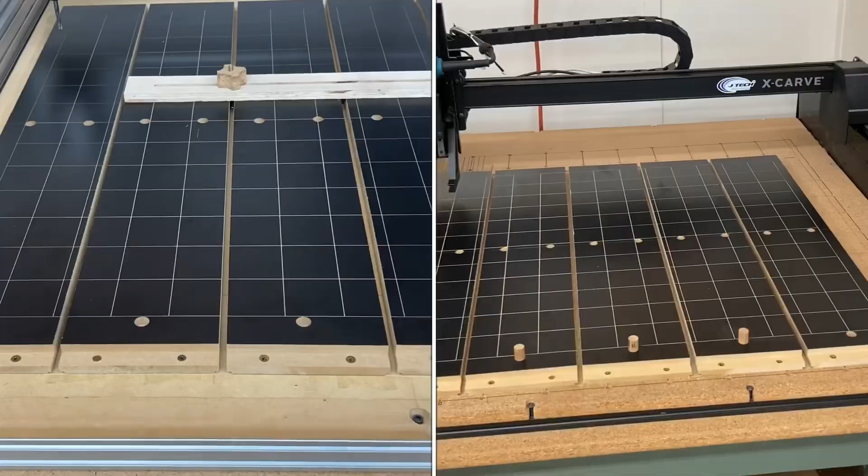The plan is to use the same design that I used on the CNC for Newbie new carve machine. This has worked absolutely fantastic, and I love this new wasteboard and the clamping system that I have. So I'm going to do the exact same thing. When I designed the grid work that I carved into the wasteboard, I used the XCarve Pro. And today I want to be using the Easel software to set up the same program.

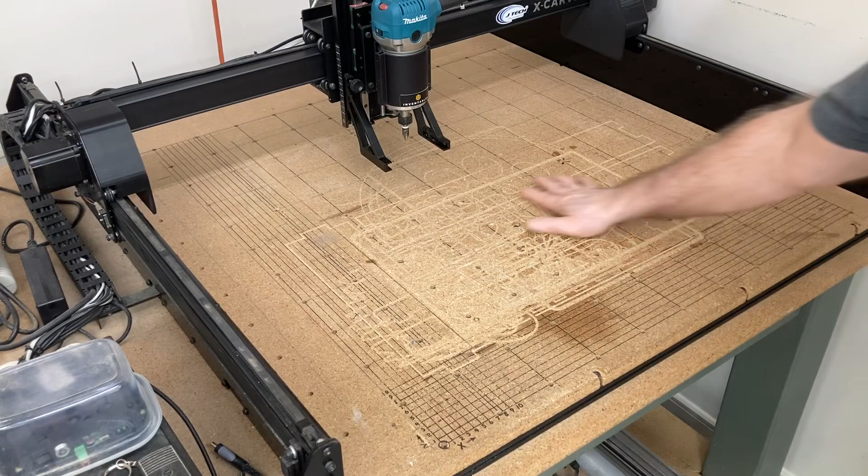Now this is the original wasteboard that I put on this machine when I bought it. Now this is actual particle board. This is not medium density fiberboard. And if I had to do it over again, I would use the MDF or the medium density fiberboard. The particle board has served its purpose and has done well. And if I remember correctly, I bought this machine back in November of 2016 or thereabouts. Don't quote me on that. And this is the original wasteboard that I had put on.

And this actually is the high spot. This board has been chewed away in this area, and this is a little bit lower over in this area. And it's about a 1 millimeter difference from the high point to the low point. So the first thing we're going to do is surface this entire wasteboard, and then I'm going to add the new wasteboard on top, just as I did with the CNC for Newbie.

Now the first step is to find out exactly the space that I need to be able to surface. And I have right here the old grid work that I hand drew, and I don't recommend that. And that's something that I no longer do. But I have the XY0 home position right there, and this red line actually was my do not exceed line. I did not ever want to go beyond that point. So that was a good reference for me, and yeah, that was just drawn in. This is my other reference point right here. I really don't want to go beyond that point.

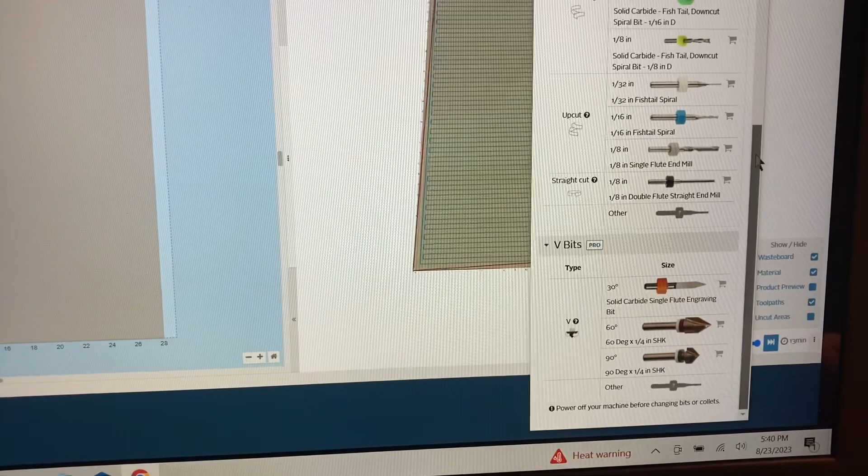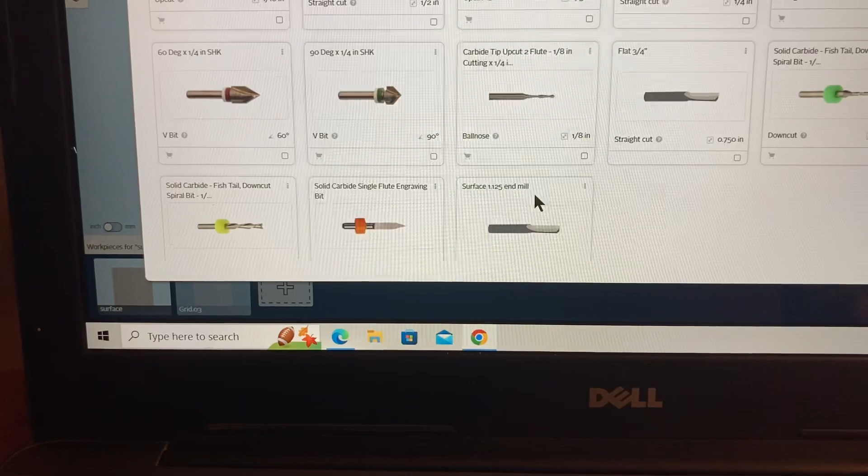First thing I want to do is show you how I set up the bit. Now this is a 1 1/8 inch bit. And when you click on the bits, you have this section right here where you can just click add a bit. And when you do that, you get to see your whole entire library of the different bits that you have. Now this is the surfacing bit that I have, and I've already entered it, but I still want to show you exactly how I did that. And you're right, no, the picture does not show a 1 1/8 inch diameter, but it's actually there.

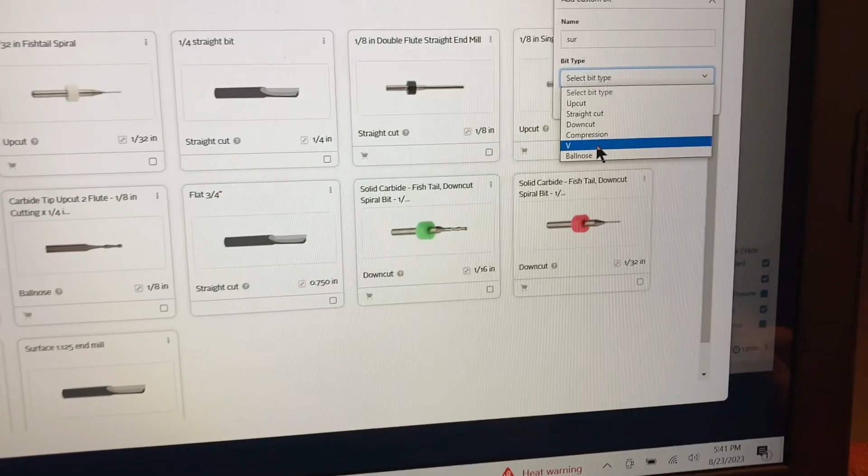So let's click on add a bit, and you get a drop-down menu where it's custom or the Inventables. Well, I'm using the custom. So you type in the name, and I put in the surfacing bit, and then you get to put the type. Well, it's basically an end mill, but you can see a wide variety of different choices. So I'm going to select the straight bit because that's the best option that I have, and then it brings you up to the size. And this is where you put in the 1.125, and then you can hit save. Now I'm not going to hit save right now because I already have it in my library, but that's the process that you go through to set up a new bit.

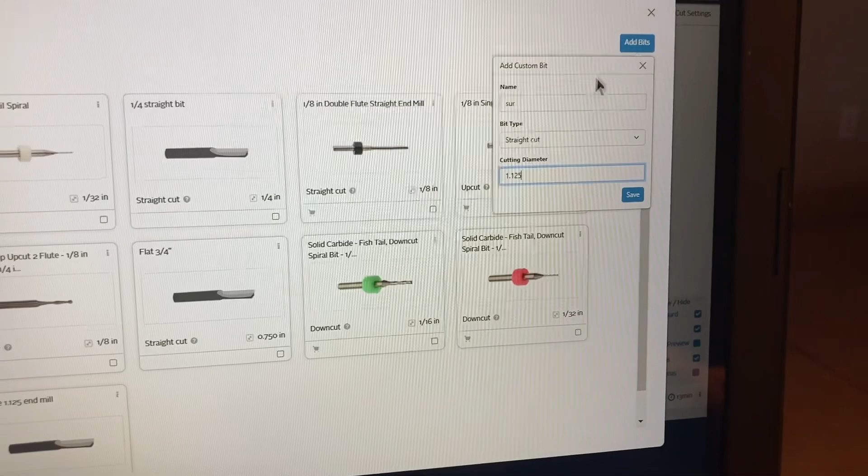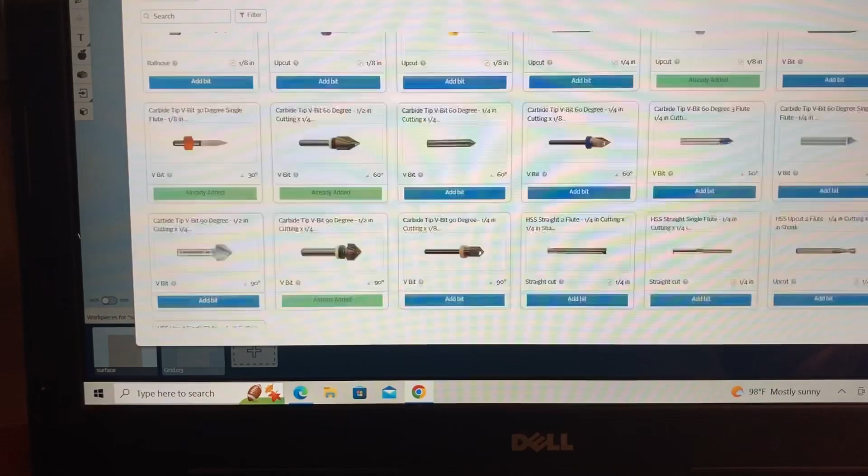And oh, by the way, if you click on add bits and select the Inventables tab, then you get to see the entire library that's available to you from Inventables. And yeah, they do have the pictures of these. So you can find the bit that you've purchased from Inventables, you can select it, you can save it, and it will add it to your library.

Okay, let's get back to surfacing the board. Now based on those measurements, I need to be able to have an area that's going to be surfaced as 28 by 28. The thickness doesn't really matter. So at the drop-down menu, I'll pull out a square, and I'll change the size of this to the 28 inches by 28 inches. And I can do that right up here on this little drop-down menu.

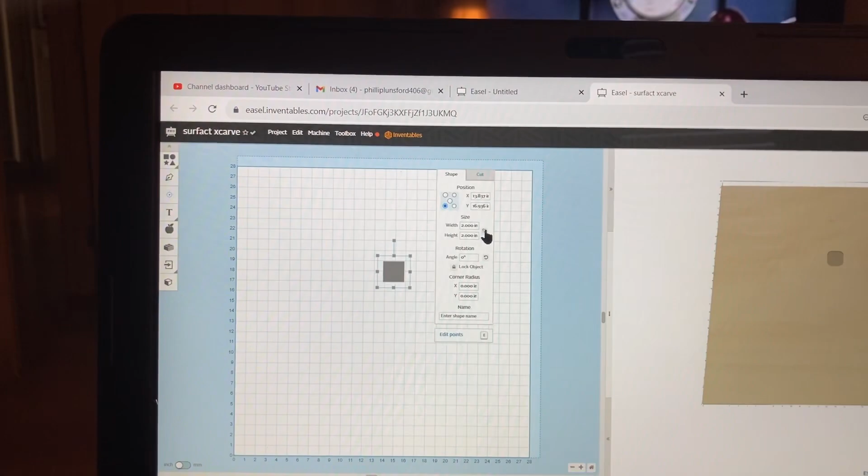Now the easiest way is just to lock that little tab right there, and then I can just type in the 28 inches, and that will take care of it. So you see where I locked it, then I'll just type in 28 inches, and that gives me a 28 by 28 inch square. From there, I can come up to the edit menu and select center to the material, and that brings it down and puts it directly on top of the work area that I have established, which also is the 28 inches by the 28 inches.

Now as far as the cut depth, I don't want to cut it down very much. I'm going to cut down 0.06 of an inch, which is about 1.5 millimeter, and that's going to be my start point to surface the wasteboard. And we'll cut it the first time, see how it looks, and if we need to run it a second time, we can do that also. Now I know that my wasteboard is at least 1.5 millimeters low in that area that I had showed you earlier. So that's going to be the first surfacing, and there's no need to take an aggressive approach to this.

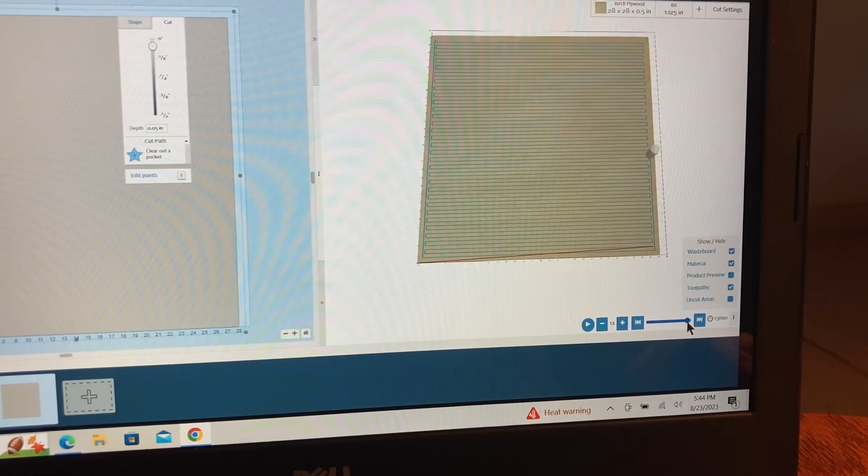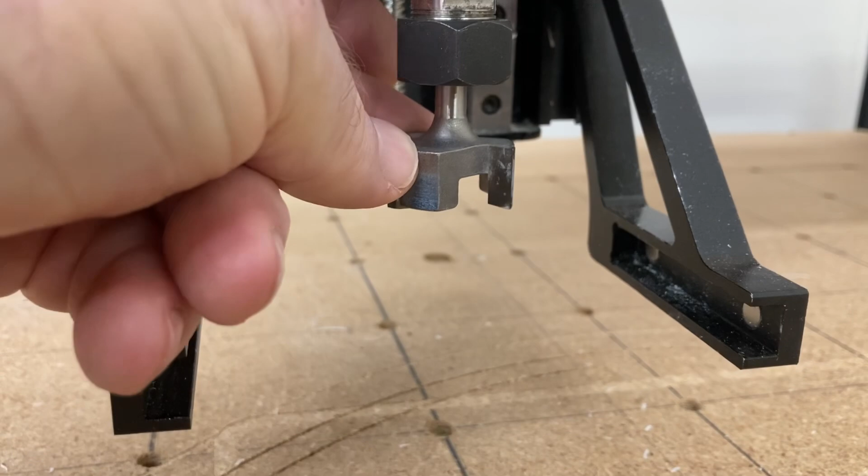Now I hit the simulate, and you can see that I had set up the raster setting in the Pro Easel, and you can see exactly how it's going to cut the surface of the wasteboard. Let's go out to the machine and actually get this cut. I want to show you a close-up of the bit that I'm using. This is my 1 1/8 inch surfacing bit, or my 1.125 inch bit, and you can see I've used it quite a bit.

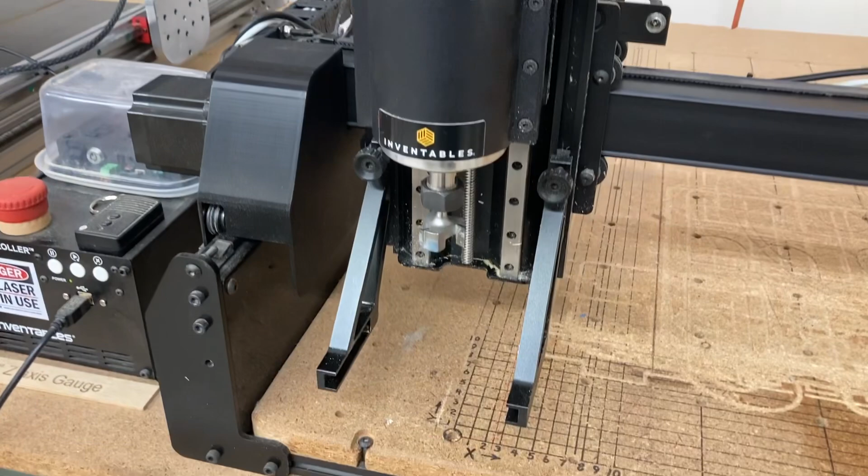The first step is to start the machine and home the machine, and that brings it right down to my XY0 home position. And this is the machine home position. From there, I'm going to actually probe the machine at this point, because I know this is the high point on the entire wasteboard. I think it's best to start from the high point. Now, if you knew on your wasteboard a high point was someplace else, I would move the machine over to that location, and I would do the Z-probe at that highest point.

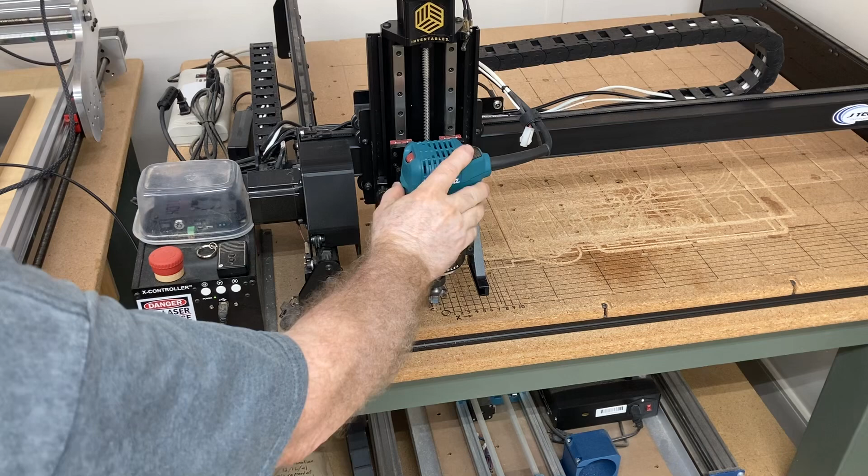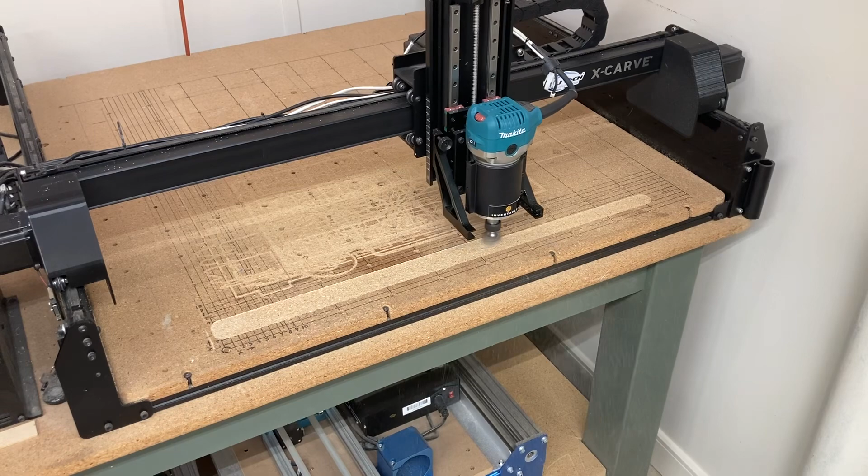So now it's time to complete the checklist. I'll turn the machine on, and we'll get started surfacing this wasteboard. I always find it interesting to see the toolpath that is generated by the Inventables Easel software, because this first path going all the way across to the other side is really wasted motion, but it still gets the job done. And at this point, with the raster set in the machine, it's going to continue all the way across just in this manner. Now at this point, you can see it surfacing really well, and it's getting cut down about that 1.5 millimeters as it should.

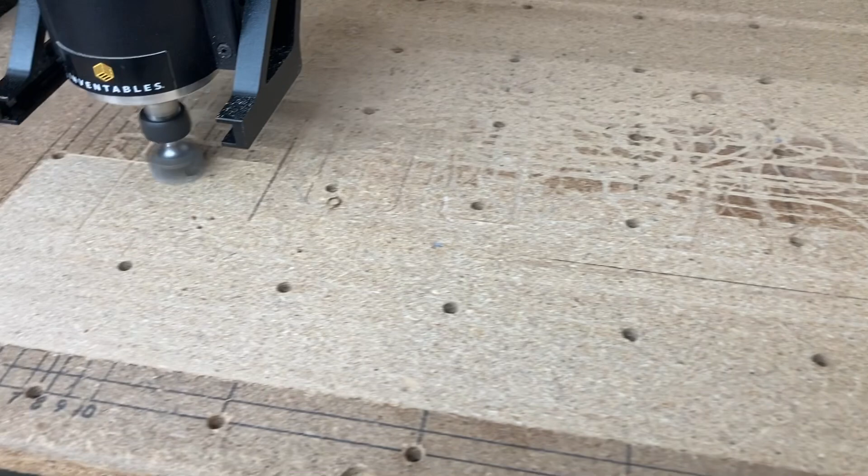Now it progresses across the entire surface, and you can see it getting over to that low area, how you have a little bit of a cut there, and as it moves across, it gets to the point where it's really not cutting at all. You can see a tiny little bit there, but as it gets to that low spot, there is no cutting whatsoever. So there's my 1.5 millimeter low point, because right now this router is not cutting any material at all. The lines that I had drawn on there are still there.

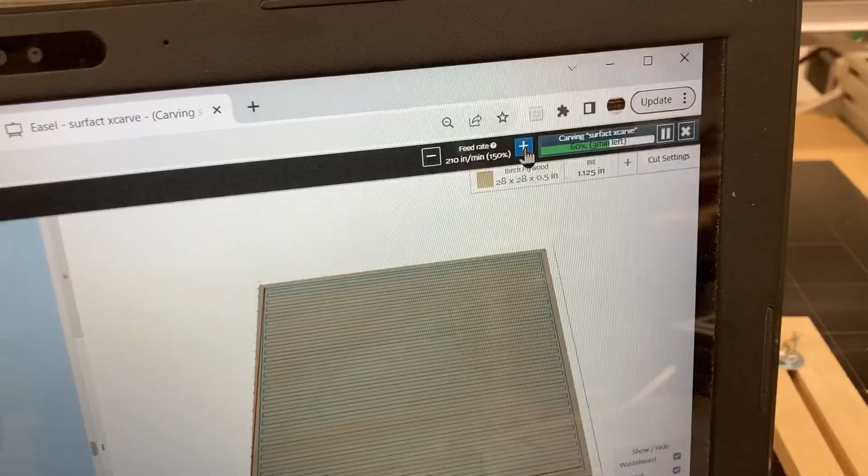I'm going to complete this operation so the areas that do need to get cut down will get cut down, that 0.06 or the 1.5 millimeters, and then we'll actually surface this board one more time. That's the only way that we're going to truly get it completely flat. As far as the feed rate, you can see here I'm running at 210 inches per minute, and that's doing an excellent job. The first pass is completed, and you can see that little bit of a groove there, and that's what you want. You want it to be able to cut just below the surface. And over here, it's a little bit the same way, but as you look at the overall board, you can see where those low spots were and the areas that did not carve at all.

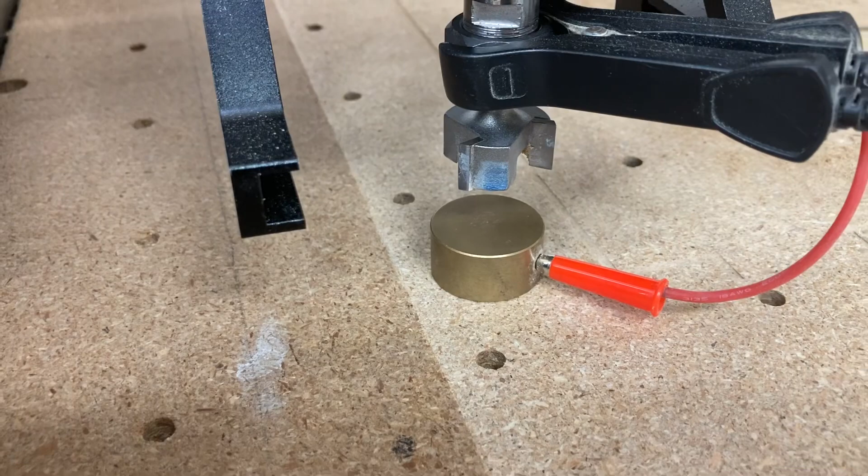So let's do this again. Now I'm going to use the probe on that area that we had just cut. Now that that's completed, I'll put the probe away, and I'm going to use the last XY0 position. There's no need to reset that. So then I'll just complete the checklist, and we'll hit the start button to carve it, and we'll go through this entire thing again. And I think you'll see that's going to be a big difference. As I hit carve, you realize I don't need to go back to that home position. It knows where to go, and that will start exactly where it needs to start. And it's going to cut down again that 1.5 millimeters or the 0.06 of an inch.

And now you see that little ridge that's being generated all the way across. That's what you want. Now this, as a completed board, looks absolutely fantastic. It's perfectly smooth, and that is what you want to be able to have. That gives me a good foundation to be able to put the new wasteboard on.

The other thing that it does, I've measured this, and it's exactly 28 inches by 28 inches. And you can see the ridge there being a little bit more than the ridge over there. That's okay. But now it's time to cut the new slats for the wasteboard. And I measured the 28 inches. I divided that by the 5 boards that I want. So basically about 5 5/8 of an inch is what I'm going to be using.

As far as the length, I'm going to cut these just a little bit shorter than the 28 inches. I don't need it to be completely tight dropping into this little pocket, but I do want to have it where the material will completely be encased in the pocket that I've cut out. After cutting all of these boards on the table saw, I like to do a test fit. Before I do all the rest of the milling operation, I want to make sure that these are going to fit into that pocket that I created.

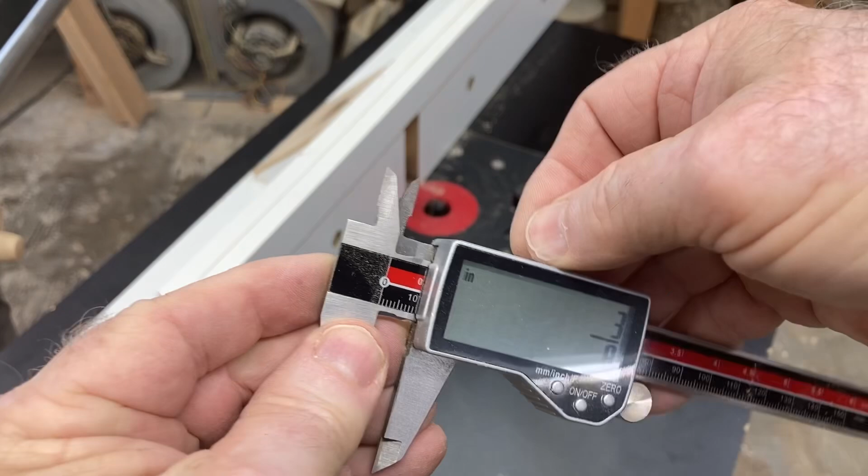The first operation is to cut down a rabbet 3/8 of an inch deep, and I'm going to make it 3/4 inch long. And that way I can secure the front and the back area of these boards. I can use the calipers to set this, and all I need to do is just raise the bit right up to that point, and I have my 3/8 of an inch. I also want this rabbet about 3/4 of an inch wide.

I'm also doing multiple passes. I don't need to try to get all of this material cut in one pass. So taking 2 to 3 passes is a good, safe way to do it. Of course, the last pass is right against the fence, and that will give me the proper distance that I need to complete this rabbet joint. Now this looks real good, so I'll do the same process now, front and back on all 5 of the boards.

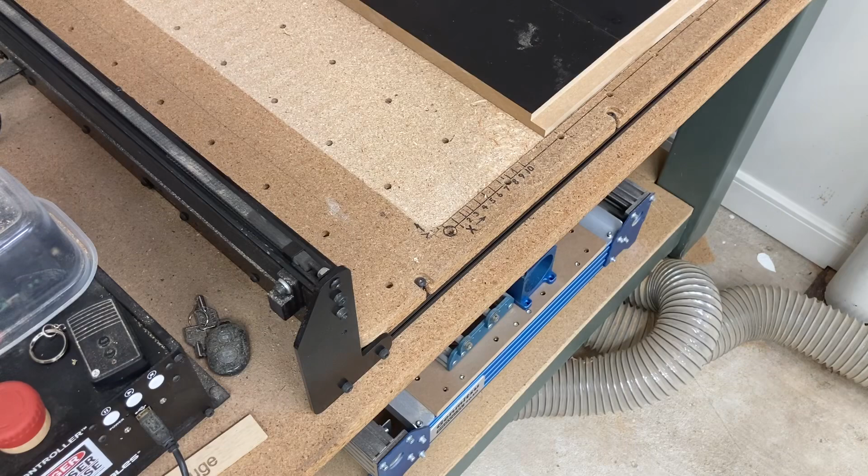The other thing I need to consider, when I surface the board, I have that radius at all 4 corners of my wasteboard. Well, I have a choice. Either make the radius on these boards, which I'm choosing to do, or I could take a chisel and try to plane that down perfectly smooth. Well, you run the risk of having it a little bit high, and I don't want to do that. The easiest way, take a socket the same size as my bit, which is 1 1/8 inch, and I mark it with a white pencil because that's the only way you can really see it on this melamine.

And then after taking it to the sander, cutting this, let's do a test fit. And if you can see there, that looks real good. To me, this is a perfect option. I don't run the risk of having a high spot in the corners if I tried to chisel out this material. So this is perfect. I'll do this on all 4 of the corners.

And now it's time to work on these T-slots. Because there's a little ridge that we have to deal with, I have to make this cut a little bit deeper. Best way to do that is to use the actual bolt itself and a pencil, and that actually sets the depth that I need. So at the router table, with that pencil line in place, I can move that right over there, raise the bit up, and I want to remove the pencil line itself.

That will give me just a little extra play to be able to have some maneuvering room when I slide that bolt into the T-slot. With all of those cut, it's time to test again. Yes, I do. I like to test. So now, look at that. It slides in perfectly. That's what I wanted to have happen. That way, that little ridge on the original wasteboard is not a factor at all.

It's time to take these boards over to the drill press. I'm going to pre-drill all of the holes on the front and the back. You have to be able to pre-drill with this MDF. Otherwise, it's going to be a mess. So pre-drill the holes, front and back. I have my fence set up on the drill press, so there's no measuring necessary to get all of these drilled.

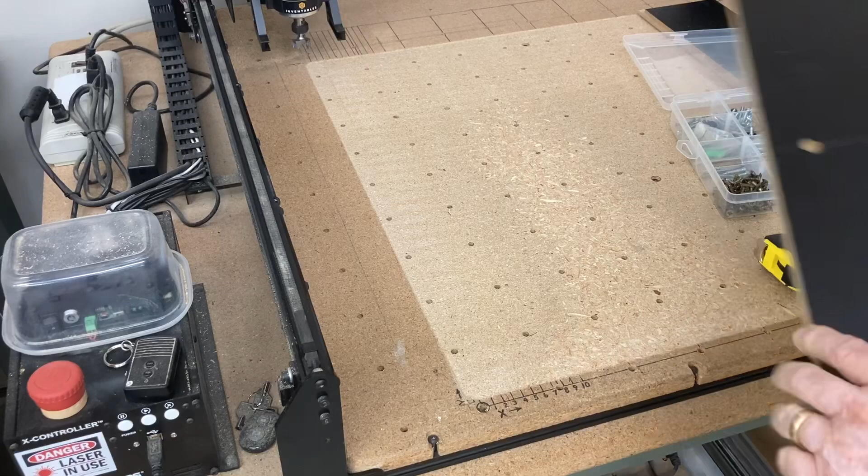It's time to actually mount these boards now, and I'm lining it to the edge where that ridge is, and I'm bringing it all the way to the front. The screws that I'm using is a wood screw. It's a 3/4 inch wood screw. And yeah, that's right. This is a little bit unusual from what you typically see, but I have found the wood screw does an extremely good job, and it does not cause any problems whatsoever. And it's a flat head, so it's below the surface, and you don't run the risk of the router bit hitting these screws at all.

All of these boards now are in place, and we'll take the bolt and just test fit everything, and you can see how smooth this works. You don't need to buy the expensive T-tracks. It's not necessary. This will hold and work extremely well for many years to come.

Now comes the fun part. We've got everything done now except for the grid work, and I do believe it's really important to be able to put the grid onto the wasteboard. It's really useful. It helps you align the project, and with the grid that I'm using on 2-inch squares, it makes it where I can move the CNC machine very easily to any point that I want on the wasteboard and know exactly where I am.

Now I want to say this, as far as setting up the grid work in Easel, there's many different ways to be able to do it. The method that I'm choosing today is very similar to what I used in the X-Carve Pro. I want to be able to see just how easy it is using similar methods and be able to make that comparison. This is the XY0 position for the machine itself, but this is going to be the work position. So all the projects will be able to go right to this point. And this is 1 inch over, 2 inches up. And that's going to be a very convenient starting point to be able to use as my reference point.

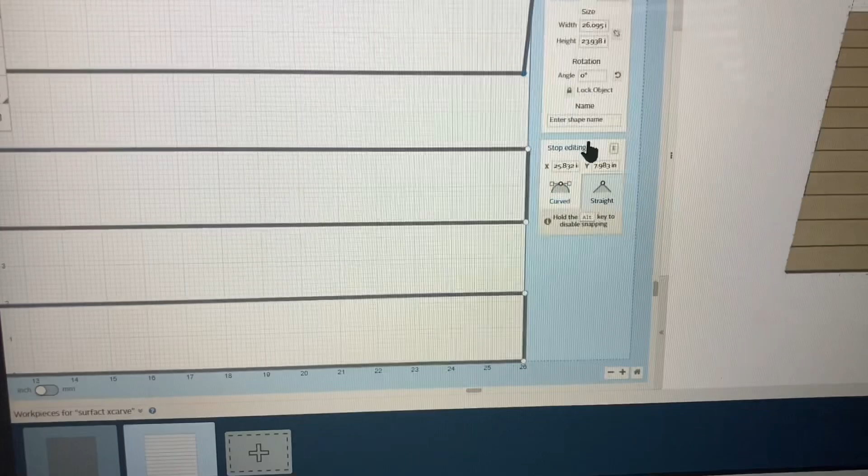Okay, this first section is completely done, and you can see all the different variations. It's not straight at all. And if we carved it this way, it would look horrible. Now this is one continuous line, so just click on one line, you'll get this drop-down menu. Now you can click on Edit Nodes, and you can click on one node, just like this, and it turns the dark color. And then you can put in the exact coordinates that you need to. In this case, it'd be 26 inches, and it's going to be 8 inches.

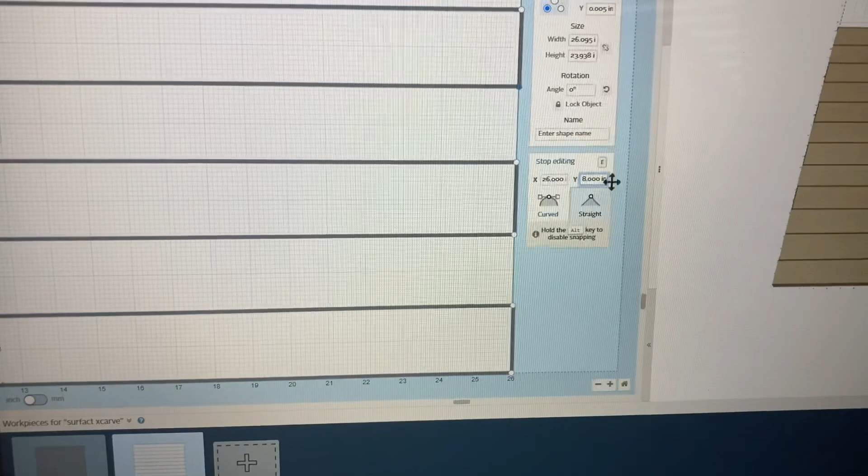And then you can move to the next node. Now this actually goes very quickly, so don't get upset with the fact that there's a lot of work here, because it really is not. Now as far as the bit that we're using, this is the 30-degree V bit, and we're going to be carving this grid down 0.03 of an inch.

So this is my XY0 home position. So I moved it over 1 inch, I moved it up 2 inches, and that little dot is going to be my work position for my X and Y 0. The 0, 0 point for the grid is right there. That's where it'll start. Now I did my probe right there at that XY0 position.

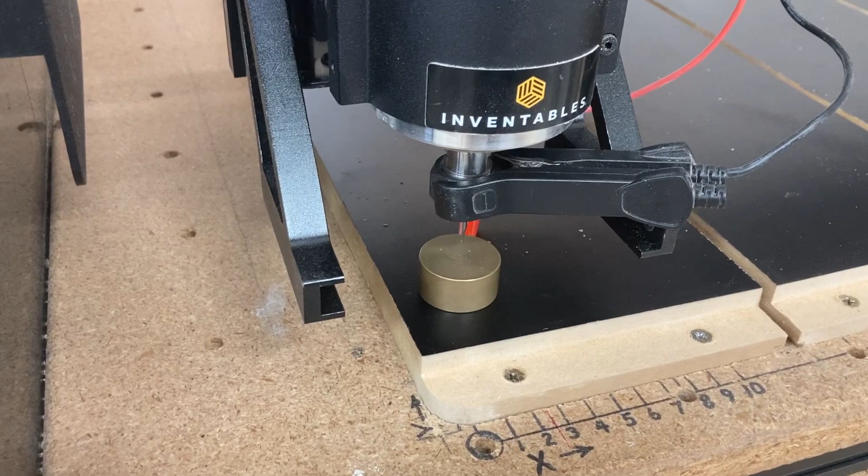Now I do want to add one thing. Once you finish editing all the nodes on the x-axis, then you just need to turn and do one more full line on the y-axis just as you did, and repeat that same exact process. Edit those nodes, and then we start to carve. Let's turn the spindle on and see the end results. We'll hit carve, and let's take a look at it.

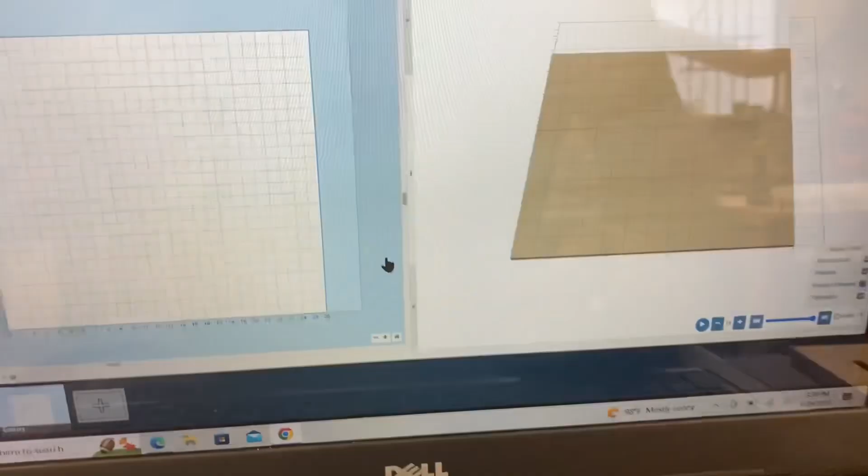Now this toolpath is actually very effective. It's going to start with that second line that we did on the y-axis. So this is where I began, right here at the top right-hand corner. So in essence, that was the first node, and it's going to come a straight line right down to this next node, and it's going to turn and go the 2 inches over and back up to the next one. It's going to follow each individual node at those points where it needs to turn.

So this is a very effective tool path. It goes very quickly and it gives you a very precise grid. Now the other thing I want to point out, you notice it's not following a straight line all the way across. That's okay, because when this comes back and does the x-axis, it'll fill in those spaces. And it's going to be exactly on top of the lines that are there. You won't even know that it wasn't done to begin with.

At this point, the y-axis is almost finished. It's finishing that last portion of this one continuous line. The router lifts up and it comes all the way back down to my XY0 position. This is where the x-axis begins. And you can see how that line is a straight line across, and it crosses over those other lines. And it makes for one continuous perfect line.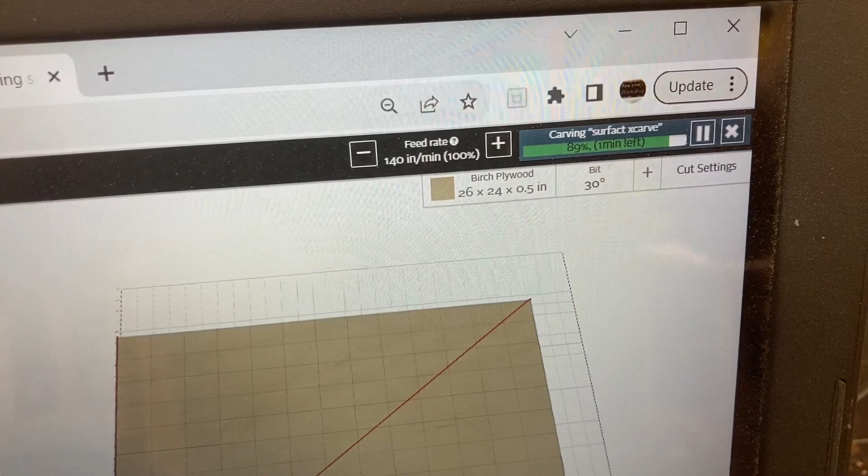Don't get upset by the fact that there's a little bit of duplication and that it's going over an existing line, because this tool path is very effective, very efficient, and it's the quickest, easiest way to be able to do it. This is being carved at 140 inches per minute. The grid now is almost finishing. It's coming back to that final point, and that completes the grid, and it returns back to my home position. That grid looks absolutely beautiful.

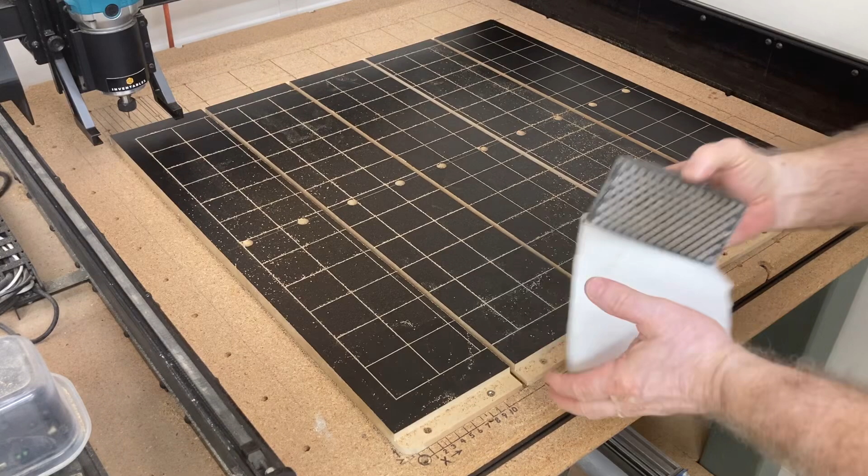Now, the only thing I need to do is just wipe this off, and those lines look beautiful. Now, I don't want to take sandpaper, but I can take just a paper towel, and that will clean that up really well. And that makes those lines look really, really good. Let me get a vacuum. We'll vacuum that up. We'll show you the finished product.

Now this grid was set at 0.03 of an inch. And you can see these lines look very, very good throughout the whole entire pattern. So that will tell you that this is very flat and it's level compared to the machine itself. So when you surface it, you get a good flat area underneath there. When you put this down, that too will give you a very flat surface to work on. Okay, the grid's done. Now we need to work on the fence, and I'm going to use the dowel rod system for that.

And the first thing is, let's do a test. I'm going to drill one hole that is 0.522 inches in diameter and only 1/4 inch deep. That's all we need. And I'm using a 1/4 inch upcut bit to be able to do this. A quick test with the dowel rod, make sure that it fits, and that fits absolutely fantastic. So that's going to work.

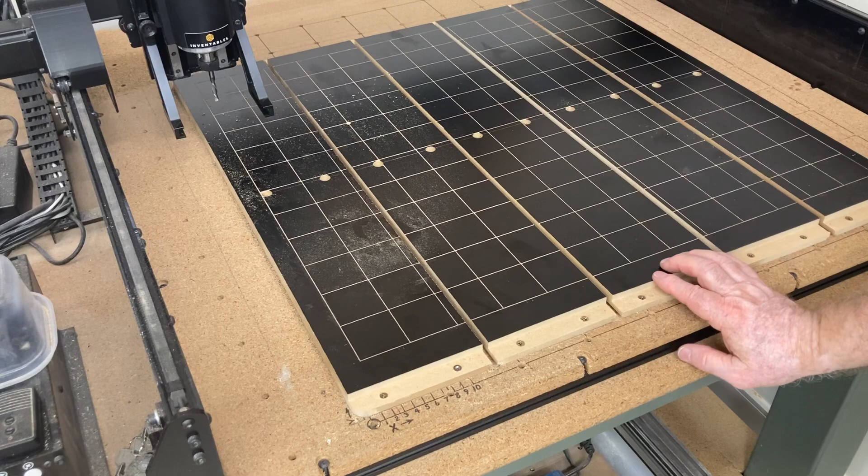Now the next thing that I want to do is put the holes right here to be able to establish a fence. I've used the dowel rods to drop in there, and that will establish the fence, and I can put these in and out depending on the type of project that I'm doing. So if I want to do a tiling project, I just pull these little dowel pins out and store them. And if I'm doing a regular project, I'll just drop them in.

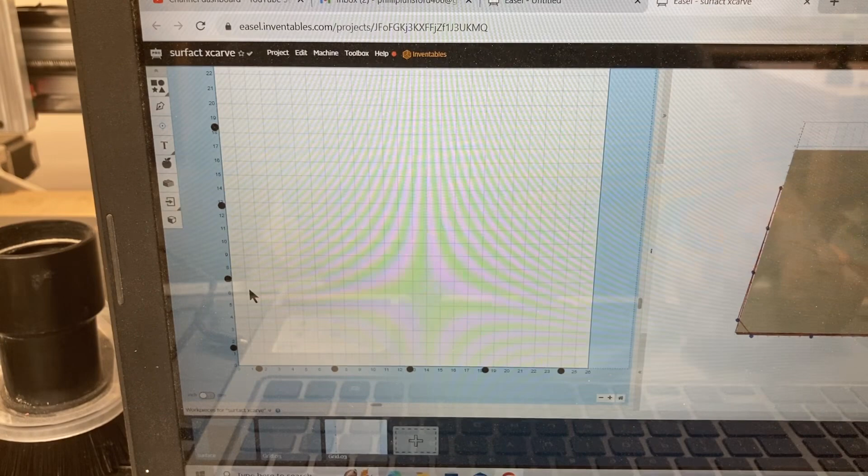Now I'm going to put these along this axis as well as the y-axis, and I want them right on this outer edge. And again, this is going to be my XY0 work position, and yes, I can carve on the outside of that. Now this is the layout that I have. These holes are 0.522 in diameter, and they're going to be cutting down 3/8 of an inch. Half of that is 0.261. So literally all of these are just set up on a coordinate system.

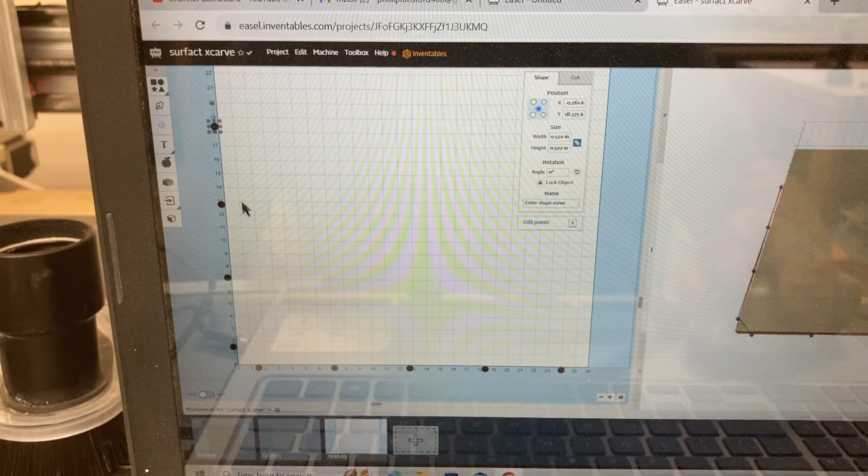So you can see I have this at a minus 0.261, and as far as the position, it's 18.375 off of this home position. And each one of these are set up exactly the same way, at 12.75, and again the minus 0.261. These are actually 5 5/8 of an inch. And the reason that I chose that measurement is because that's the same measurement down here that put these holes in the center of my boards. So since these were set up in that manner, I wanted to set this up in the same exact manner. I'm starting off with 1.5 inches from my 0 position on both the X and the Y axis.

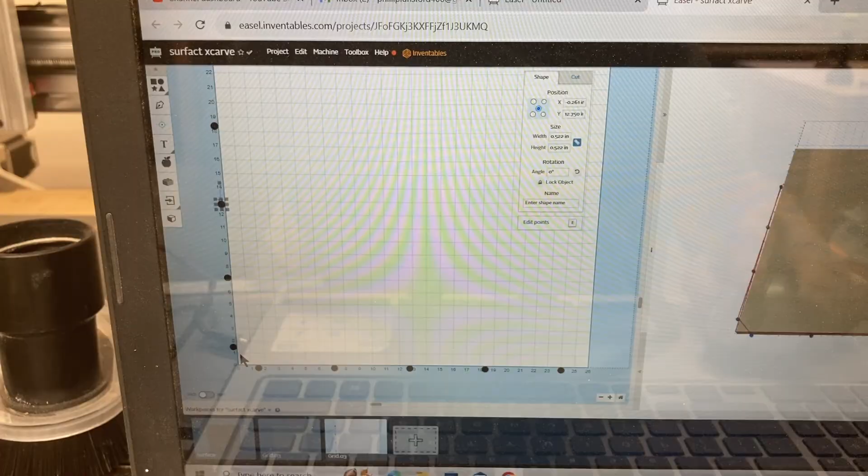So it's time to carve the holes. I'll go through the checklist. I turn on the router, and again, this is a 1/4 inch upcut bit that I'm using for this. And it's going to start at the very top on the y-axis and cut the first one and just move right down in a very orderly fashion. Again, this is a very effective toolpath that it's following.

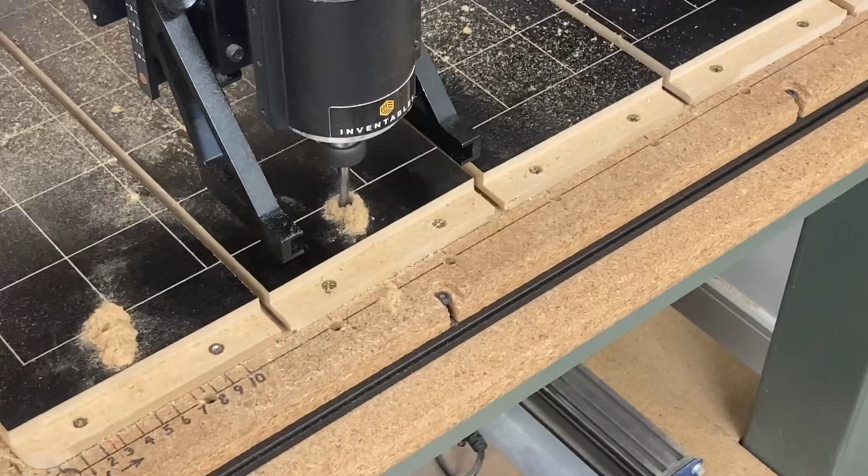There are many different designs that you can use for a fence, but for me, I wanted to have something very simple and easy to use and to make taking it on and off very simple depending on the type of projects. And to me, this is the most simple way to do it. It's just controlled by the dowel pin being put into the hole. And you can use as many dowel pins or as few, whatever is necessary.

But this completes it. So now, turn off the router and let's just double check and make sure that these dowel pins are going to fit. Of course they are. Why? We already did the test. We know that they're going to fit. And using the coordinate system, as I showed you, to get the exact placement of these holes, you can see the accuracy. It follows right to the edge of that line, and that's exactly what I wanted.

That gives you a very accurate fence that's not going to have any reason to be out of square because, let's face it, the CNC machine actually did the cutting. So it's going to be 100% accurate following that exact line on both the x-axis and the y-axis. And this gives you, to me, the best of both worlds. A very simple and accurate fence.